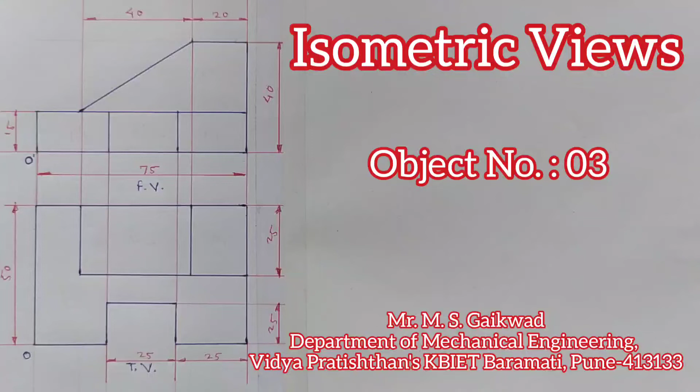Hello friends, welcome. We will solve one more problem on isometric views. We have these orthographic views, front view and top view, and we have to draw an isometric view.

The length of this object is 75 mm, the height is 40 mm, and the width is 50 millimeters.

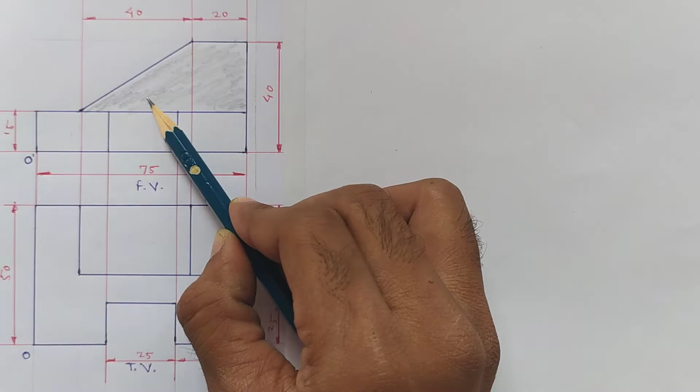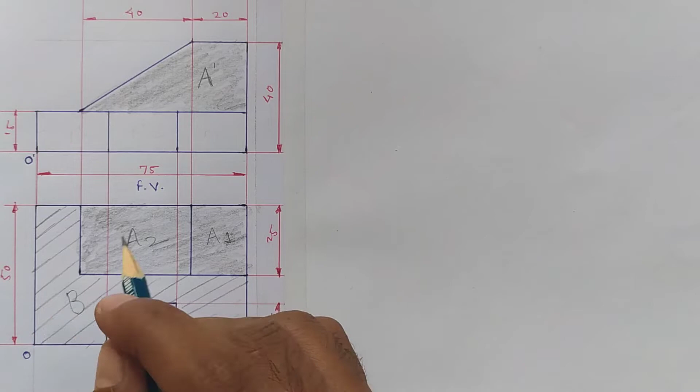Now we should observe these views carefully. I will divide these views into different blocks. This highlighted block, say A dash, has two parts in the top view: this is A1 and this is A2. The remaining block, this is B in top view, and the same block has three parts in front view: B1, B2 and B3.

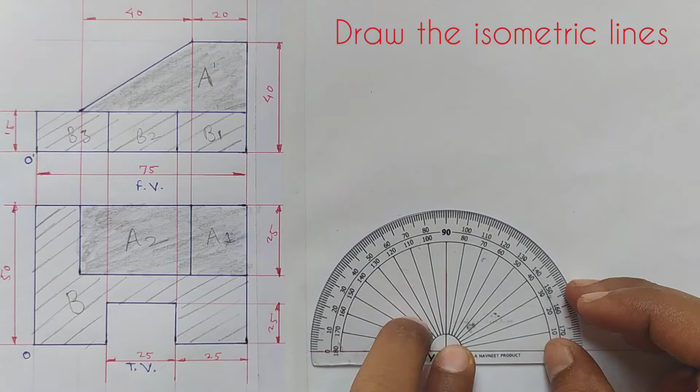Now we will draw the isometric lines. First draw a horizontal line and mark the origin point on this line. Then draw a vertical line perpendicular to this horizontal line from the origin. Then draw lines at 30-degree angles to the horizontal line from the origin, to the left side and right side. These are the isometric lines.

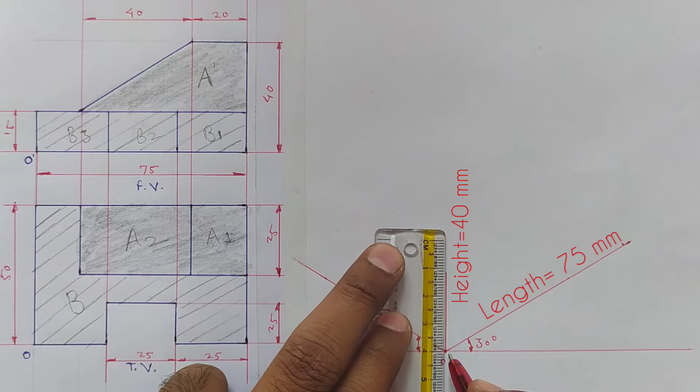We will make the isometric box on these isometric lines by taking the maximum length, maximum height and maximum width. The length is 75 mm to the right side from origin, the height is 40 mm, and the width is 50 mm to the left side.

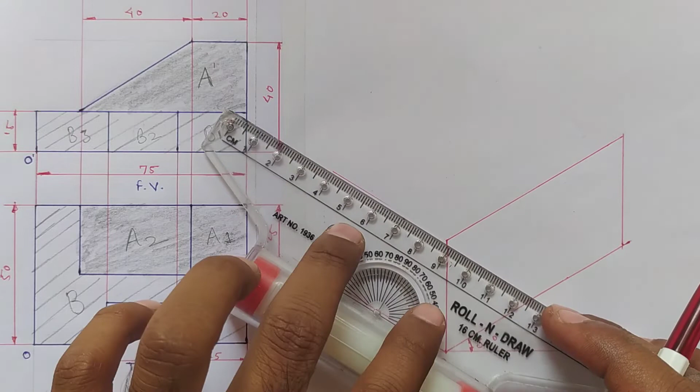Set scale parallel to this line and draw the line from this end point. Again set scale parallel to this vertical line and draw a vertical line from this end point. This is the front plane. Again set scale parallel to this line and draw the line from this point. Then set scale parallel to this vertical line and complete the side plane.

Similarly we will complete the top plane. Set scale parallel to this line and complete the top plane. This is the isometric box.

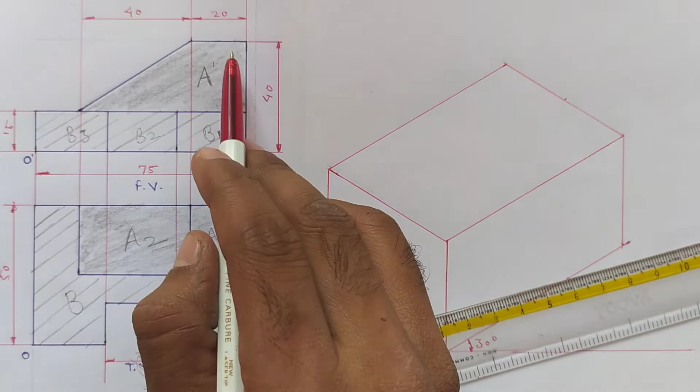Now I will complete the A1 block. This is 25 mm width and the length is 20 mm. Then make the block like this, and this block should be dark.

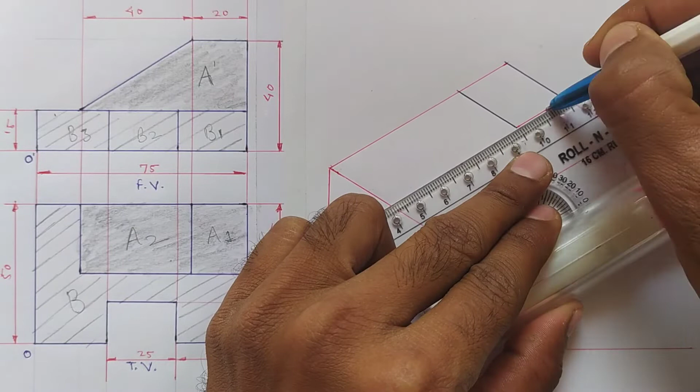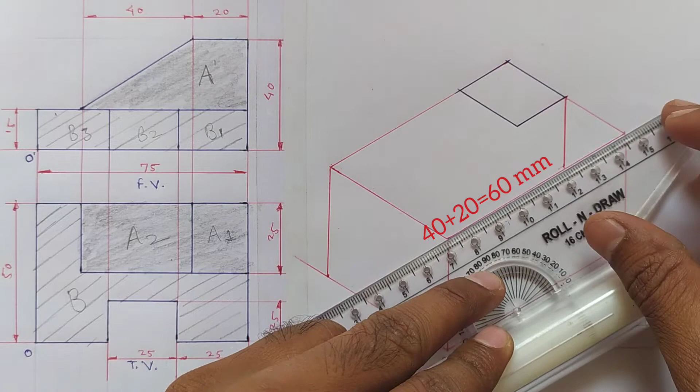Now we will draw the A2 block, but the A2 block has an inclination. It is clear from the front view. Here this is the 25 mm depth from the end point. Then this length is 60 mm, 40 plus 20. Draw the line.

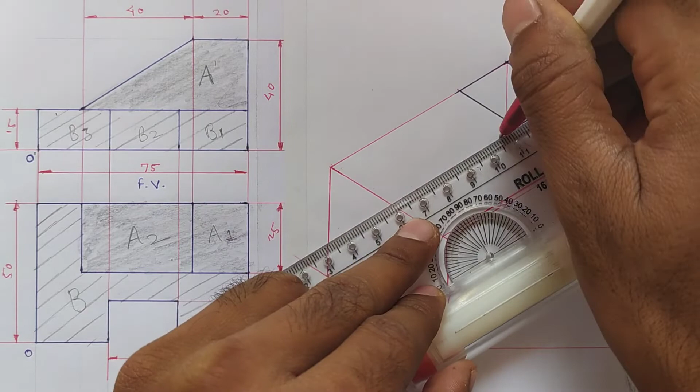Similarly we will draw the line from the back side also. This is 25 mm depth. Then join these two lines and again draw the line parallel like this and join these two end points. Then draw this inclination by joining these two points. Again join this also. Then darken this line. This is the A2 block. This is A1 and this is A2.

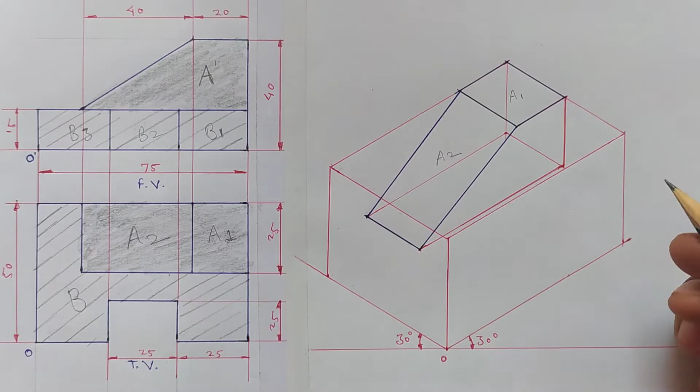This is the A dash block which is in the front view. Now extend this line up to this vertical line. Again draw the parallel line like this. Similarly in the front plane also, and join these two points.

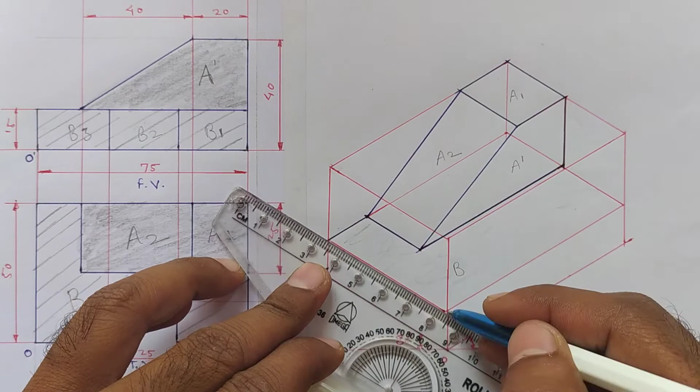Now this is the B block which is in top view. Now we will darken the lines like this. This line will be dark. Again this line will be dark.

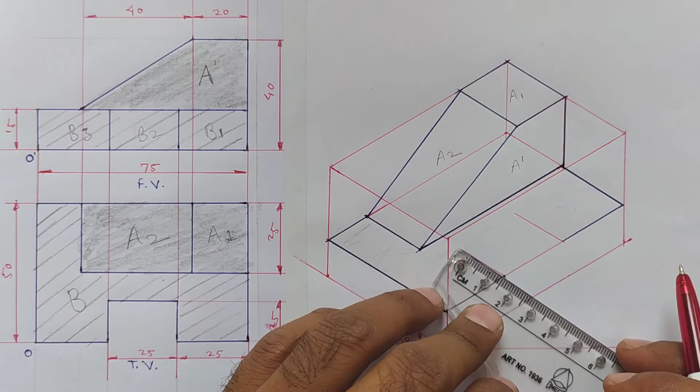Now here is the slot. The length is 25 mm from this side also and this side also 25 mm. And the width of this slot is 15 mm. Measure 15 mm from this point. Then draw the parallel line like this. Then draw the vertical lines from each point, and they complete the slot.

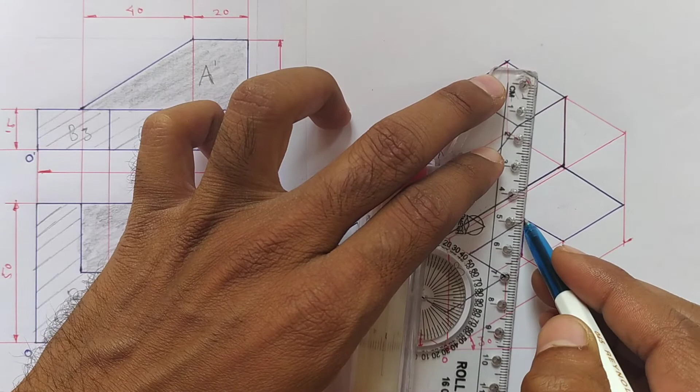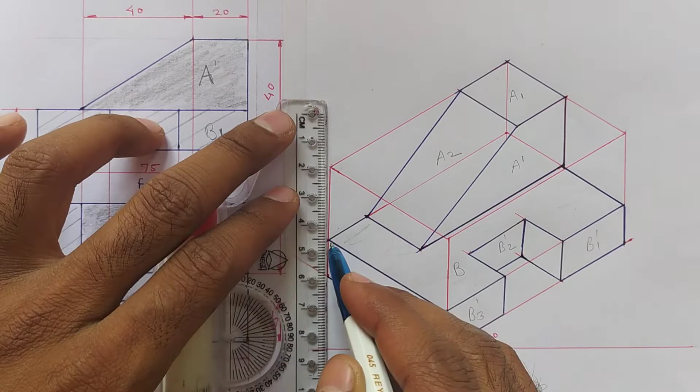Then darken all the visible lines. Now here the B1, B2 and B3 blocks are completed. Then the remaining lines should be darkened. Here the isometric view of the given front view and top view is completed.

After completing the diagram, we should give all the dimensions.